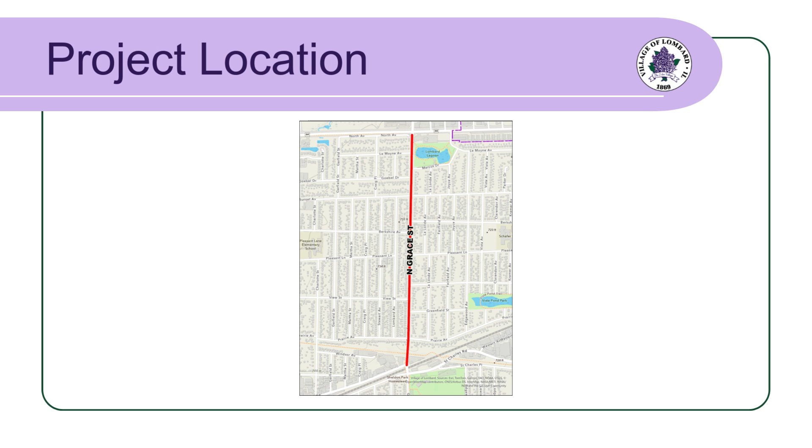The North Grace Street project limits extend from East St. Charles Road, at the railroad tracks, to the North Avenue right-of-way. This segment of the presentation will provide an overview of the project and highlight the key design elements.

Phase 1 and Phase 2 include preliminary and final design engineering. These phases address all technical, safety, and environmental standards, and also include geotechnical engineering and environmental services. All Phase 1 and 2 engineering services were fully funded by the village at a total cost of $302,645. Phase 3 covers the physical construction of the project.

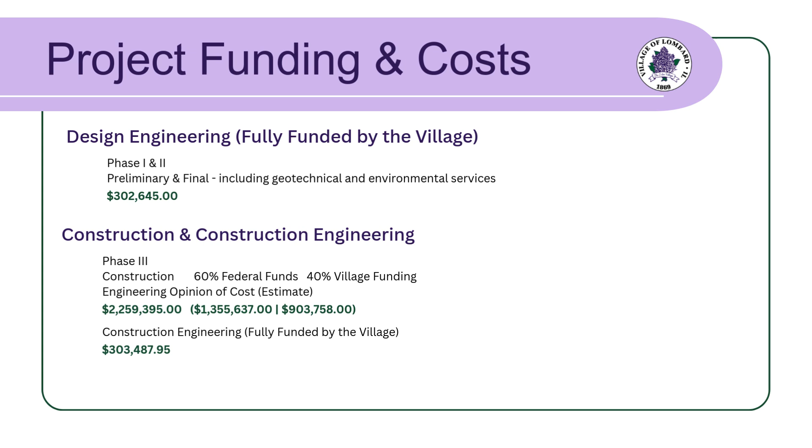Funding for this phase will be shared between the federal government and the village, with a 60% federal and 40% village cost split. The engineer's opinion of probable construction cost is $2,259,395. Construction engineering services, which include inspection and project oversight, are fully funded by the village at a cost of $303,487.95. These services ensure that the construction is completed in accordance with all approved design plans and specifications.

As a precursor to the roadway and multimodal improvements, the underground water and sewer utility system was addressed in 2023. Preliminary design engineering and environmental documentation were completed in early 2025, followed by final design engineering, which was completed in early 2026. This year's work focuses on roadway resurfacing and multimodal enhancements.

Construction is anticipated to begin in early summer 2026 and continue through early fall 2026.

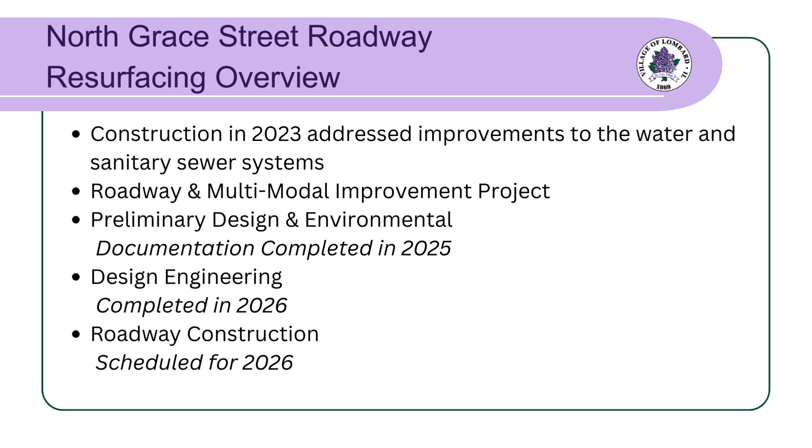Phase 1 included preliminary design, environmental documentation, and public involvement. Design alternatives consistent with Illinois Department of Transportation (IDOT) standards were presented to the Public Works and Public Safety Committees in August 2024.

A public information meeting was held on January 16, 2025, at Lombard Village Hall. The meeting provided an opportunity for residents and stakeholders to review and offer input regarding the recommended design for the North Grace Street project. Final design approval was received from IDOT in October 2025.

Following approval from the Illinois Department of Transportation, IDOT, Baxter & Woodman proceeded with Phase 2 of the project. Phase 2 encompasses the final design process, including the preparation of detailed plans, specifications, and cost estimates.

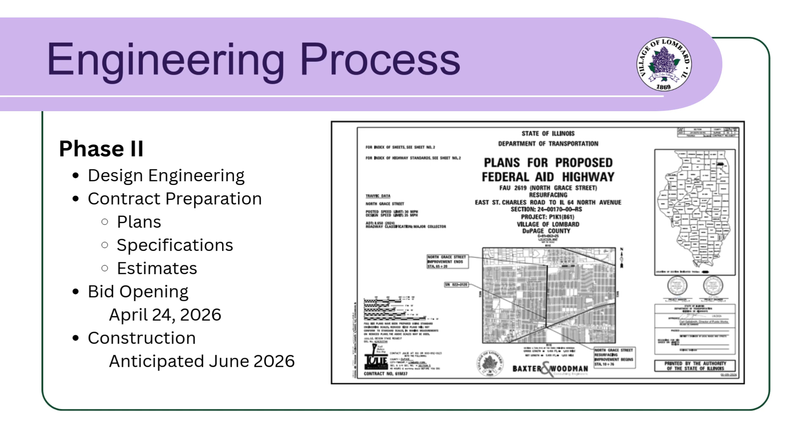The project bid opening is scheduled for April 24, 2026. Construction is anticipated to begin in June 2026. The project includes storm sewer improvements, sidewalk and ADA upgrades, pavement resurfacing and patching, updated pavement markings, and multimodal bicycle accommodations.

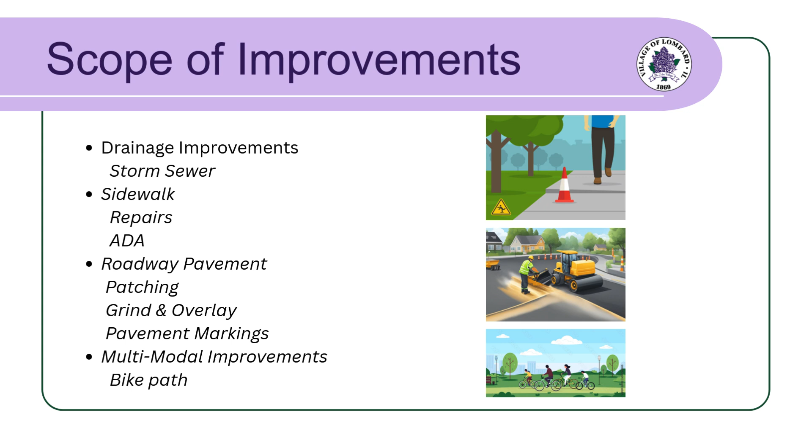Let's review each category in greater detail. Storm sewer repairs will be completed where deficiencies have been identified through closed-circuit televising (CCTV) of the storm sewer system. To enhance drainage, additional inlets will be installed near North Avenue. Necessary curb and gutter repairs will also be performed as part of the project.

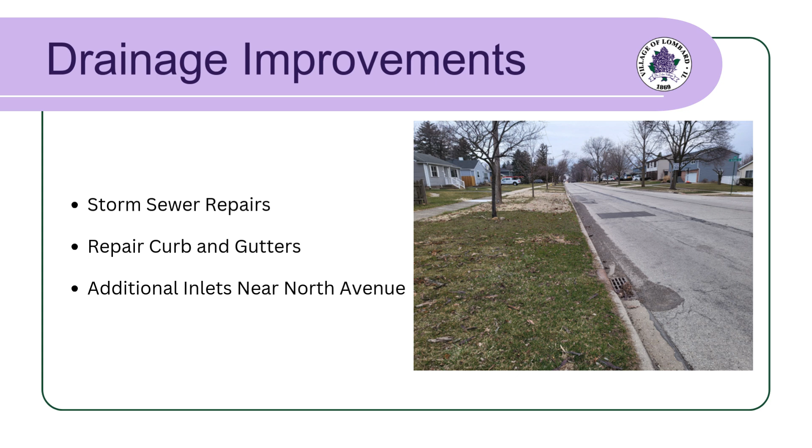Sidewalks have been evaluated for ADA compliance and potential trip hazards. Sidewalk squares with elevation differences of 1¼ inches or greater will be replaced in accordance with village policy. Severely deteriorated sidewalk squares will also be addressed. Sidewalk conditions will be re-evaluated during construction to identify any changes that may have occurred since the initial evaluation was performed.

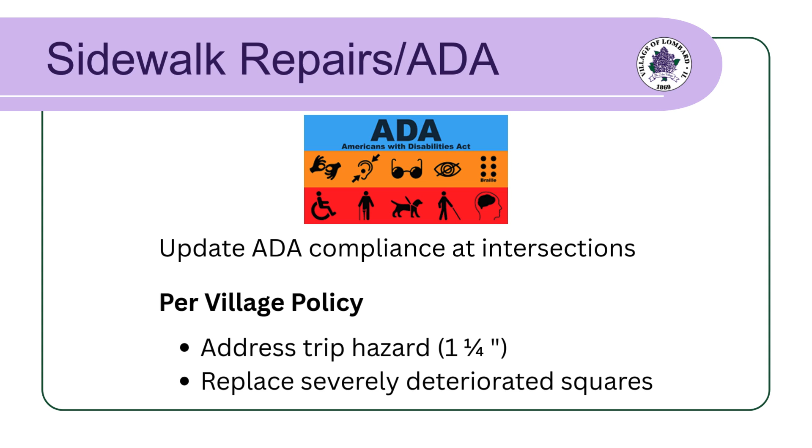Regarding the pavement, identified failing sections of asphalt will be patched as needed. The roadway will then be milled and resurfaced.

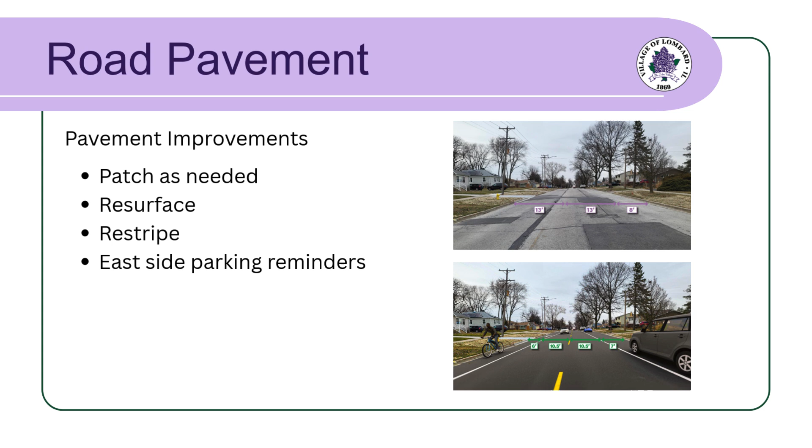Following resurfacing, the street will be restriped to include a southbound bike lane on the east side of North Grace Street from East Prairie Street to Sunset Avenue, along with crosswalks and designated parking areas on the east side of the street. Overall, parking locations will not change.

Multimodal enhancements include ADA ramp upgrades to improve accessibility and ensure compliance with the Americans with Disabilities Act. Existing curb ramps will be evaluated and reconstructed where necessary to provide proper slopes, detectable warning surfaces, and safe connections between sidewalks and crosswalks.

Crosswalk improvements are designed to increase pedestrian visibility and safety. These improvements may include refreshed pavement markings and enhanced crosswalk layouts at key intersections along the corridor.

Bicycle accommodations consistent with the village's bike plan include the addition of a designated bike lane along portions of the roadway. These improvements are intended to provide a safer and more comfortable environment for cyclists while promoting alternative transportation options within the community.

These multimodal elements were reviewed as part of the federal funding process, which required an evaluation of potential design alternatives and consideration of public input. The process included an alternatives analysis to identify the most appropriate design approach for the corridor, as well as opportunities for public comment during the project development phase. Feedback received from residents and stakeholders helped inform the final recommended improvements.

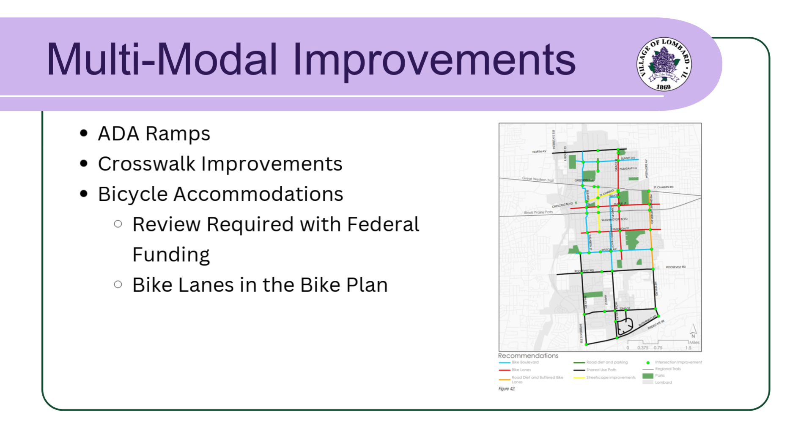The roadway will be restriped to provide dedicated bicycle facilities for safer and more accessible cycling along North Grace Street. A southbound on-street bike lane will be striped from Sunset Avenue to East Prairie Street, providing a continuous and clearly marked path for cyclists traveling in that direction.

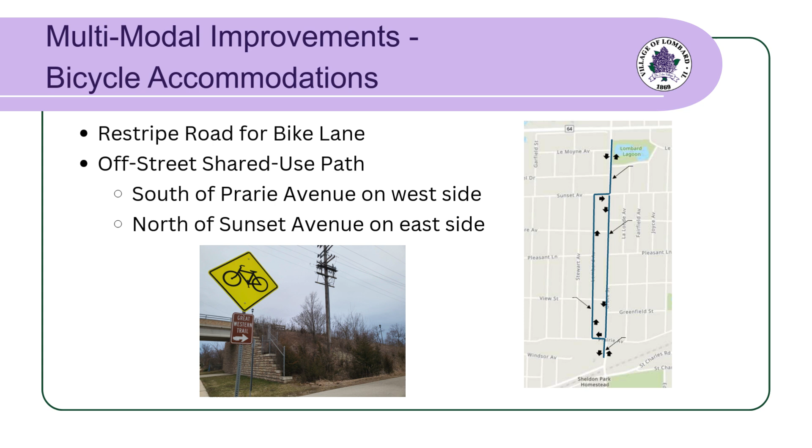Having reviewed the key design elements of the North Grace Street Roadway Improvements Project, the next portion of the presentation will focus on what residents and motorists can expect during construction. This includes the anticipated sequence of work, as well as potential impacts to roadway access, pedestrian routes, and local services. Clear communication of these details is intended to help residents plan ahead regarding any disruptions throughout the construction period.

Ray Schwab is a civil engineer with the Village of Lombard Public Works Department. He will serve as the project manager for the North Grace Street resurfacing project. Matt Champine of the Thomas Engineering Group will be the on-site resident project representative during construction. If you have questions or immediate concerns, he will be your primary contact.

Bids for the project are due on April 24 and will be opened by the Illinois Department of Transportation, IDOT. If IDOT accepts the apparent low bidder, the contract is expected to be presented to the Lombard Village Board of Trustees on May 7. Approximately 3 weeks after the award, the village, IDOT, and the selected contractor will hold a pre-construction meeting. At this meeting, a notice to proceed will be issued, and an approximate project start date will be established.

Assuming all contracts, bonds, and insurance requirements are in place, and any coordination issues with natural gas, electric, and telecommunications services are resolved, construction is expected to begin in June and be completed by October.

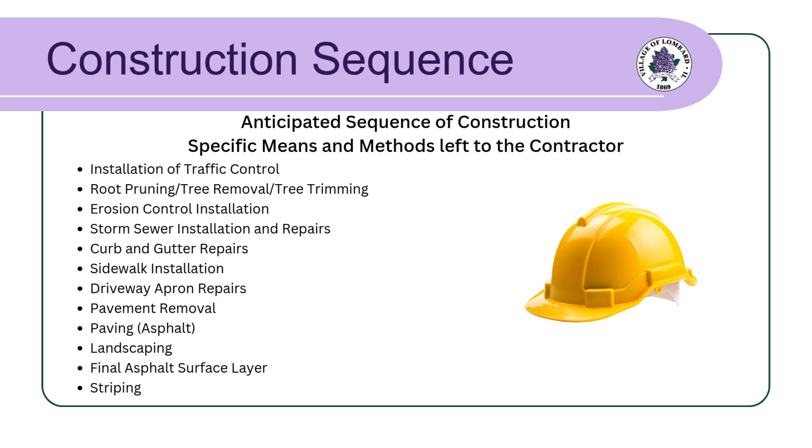The contractor retains discretion over construction methods, subject to the village's requirements for access. Residents will be kept informed about the actual construction schedule through newsletters and Notify Me updates.

Households within the construction area will receive an initial newsletter outlining what to expect during construction and instructions on how to sign up for Notify Me.

During construction, the village will communicate with residents through a series of newsletters and notices. Newsletters will provide updates on project progress and highlight any items residents should be aware of. These newsletters will be mailed every 4 to 5 weeks.

Additional notices will be hand-delivered prior to activities that may disrupt driveway access, water or sewer service, or in the event of unforeseen circumstances that result in changes to services.

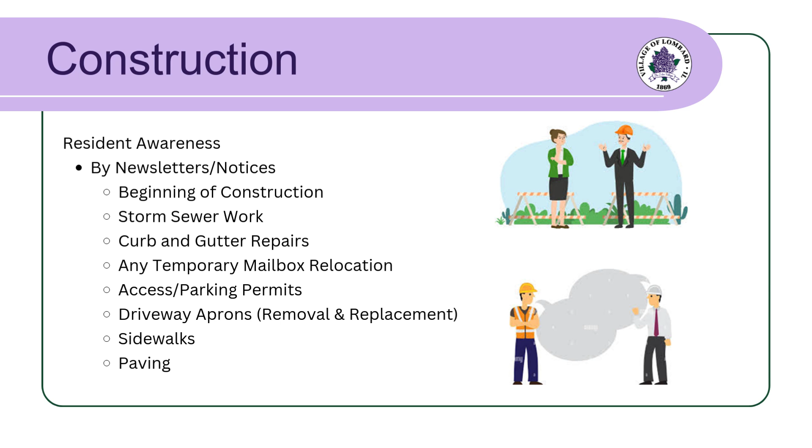The goal is to ensure residents are fully informed in advance so they can plan accordingly and minimize disruptions.

Another form of notice is advance door hangers, which inform residents of pending driveway access restrictions and any water or sewer service disruptions. Water service is typically only disrupted when a service line must be temporarily shut off, which should occur only under unforeseen circumstances.

In such cases, the on-site project representative will contact the affected household to provide an estimated duration of the disruption. As a precaution, residents are advised to keep a gallon of water in their refrigerator.

Driveway access may be limited during working hours. Under normal circumstances, residents will still be able to access their driveways in the evening.

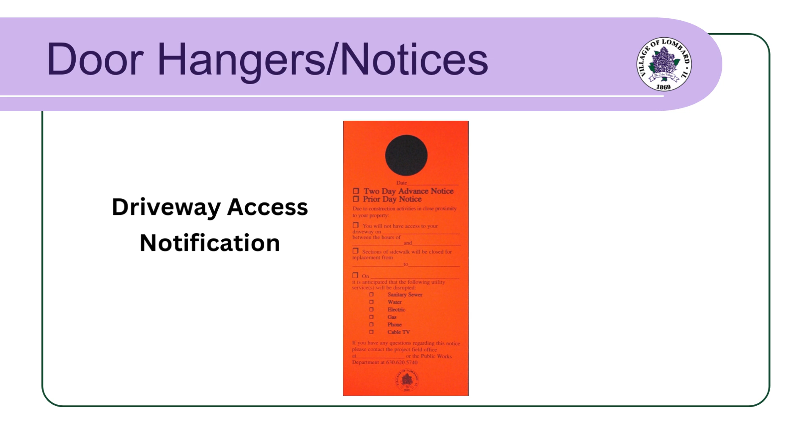Temporary overnight driveway restrictions will apply only to households directly affected by the installation of the concrete portion of the bike path, or whose driveway apron, curb or sidewalk is being replaced.

The village also offers a digital communication tool called Notify Me. Before construction begins, the village will send instructions on how to sign up for Notify Me.

Residents may also visit the village website and register for the service at any time prior to receiving the mailed instructions. Notify Me is an email-based service that delivers timely updates about specific projects or events directly to subscribers. Residents should be familiar with this system, as it was previously used during the underground utility project in 2023.

Work hours are typically 7 a.m. to 4 p.m. Under certain unforeseen events, residents may need parking passes for overnight parking.

This may occur when the contractor is placing curb and gutter, repairing storm sewers, milling or paving the roadway, or during striping operations. Residents whose concrete driveway aprons are being replaced will need parking permits while the concrete cures to a strength capable of supporting vehicle weight without causing long-term damage from premature loading.

The village will mail 2 passes per household. Residents may park overnight outside of the work zone. If additional passes are needed, contact Public Works, and extra permits will be provided.

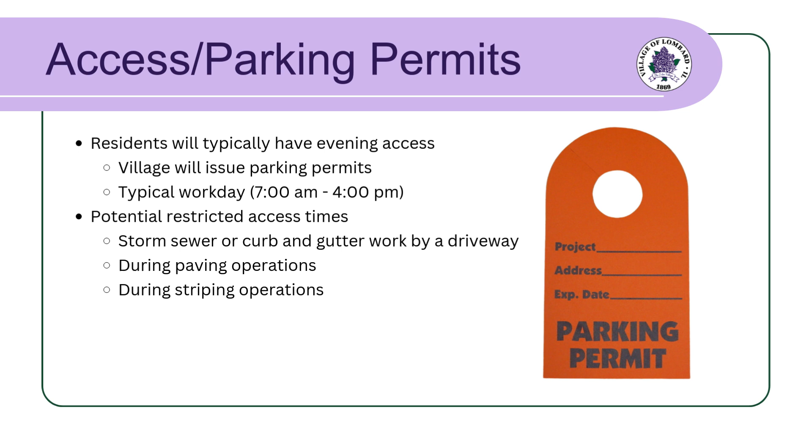Please display the passes, as the police department will be monitoring overnight parking areas. Park only in areas where parking is normally permitted.

Trees scheduled for removal and replacement have been carefully identified by the village forester and will be marked with a white X to ensure clarity for construction crews and residents.

This marking system helps prevent accidental removal of trees that are to be preserved and ensures that the construction process is sensitive to the existing tree canopy.

Replacement trees will be planted near the end of the project. The specific species of replacement trees are detailed in the project plans, and selection has been made to ensure that the new trees are well suited to the local environment.

All planting will occur under the direction of village forestry staff, who will ensure proper spacing, alignment, and soil preparation, and avoid conflicts with overhead power lines, underground utilities, and other infrastructure.

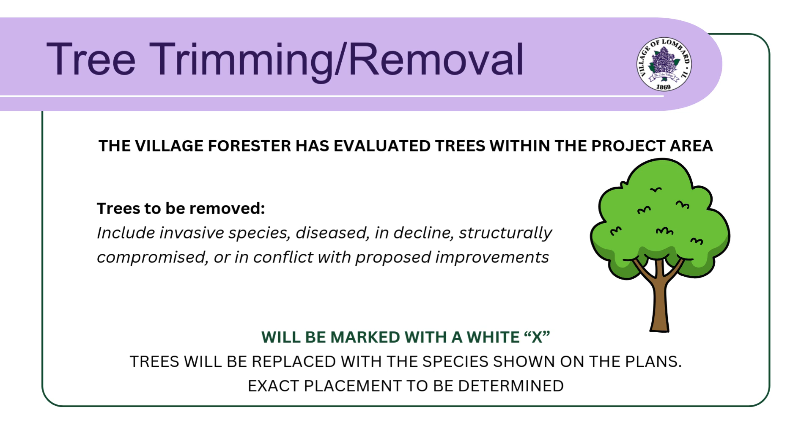Underground utility work will be limited to the replacement of select storm sewer pipes identified as being in substandard condition, targeting areas where pipes are deteriorated or damaged. In addition, storm sewer improvements will be installed near the intersection of North Avenue and North Grace Street. That segment was mandated by the Illinois Department of Transportation (IDOT) as part of the plan review and approval process, ensuring the roadway complies with IDOT drainage requirements.

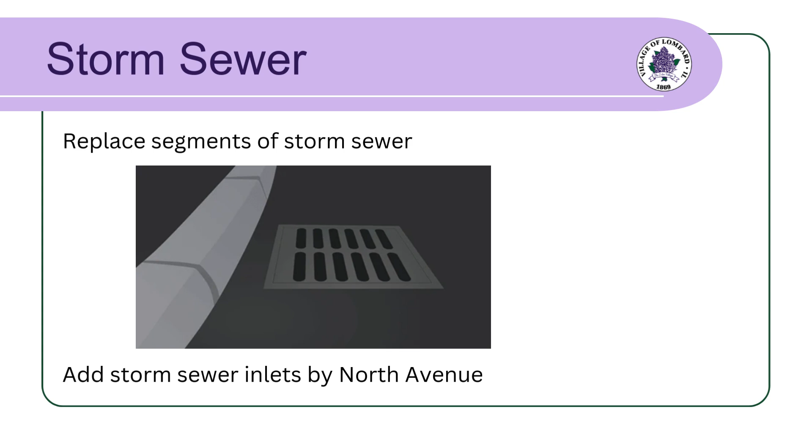Paving operations will be completed in three separate steps to ensure a durable, long-lasting roadway surface. The first operation removes approximately 2.5 inches of existing asphalt, preparing the road surface for new pavement layers and ensuring deteriorated or substandard material is replaced.

Binder course placement: the second operation involves placing a 3/4 inch thick layer of asphalt, known as the binder course. This layer provides structural strength and serves as a stable base for the final surface layer.

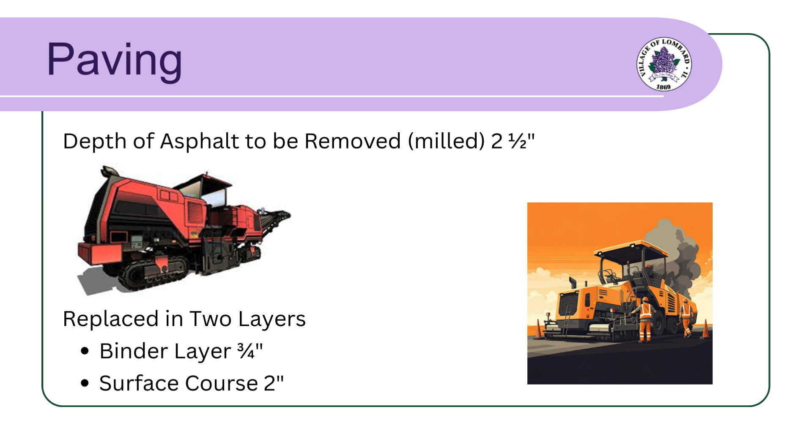Surface course placement: the final paving operation will place a 2-inch thick surface course, creating the smooth final driving surface for motorists and bicyclists. The new pavement will also incorporate an improved cross slope, designed to enhance roadway drainage and reduce water accumulation, contributing to an extended pavement lifespan.

Sidewalk squares designated for replacement include those that do not meet ADA requirements, as well as those identified under village policy as deteriorated or presenting trip hazards. This ensures the pedestrian network remains safe, accessible, and compliant with federal and local standards.

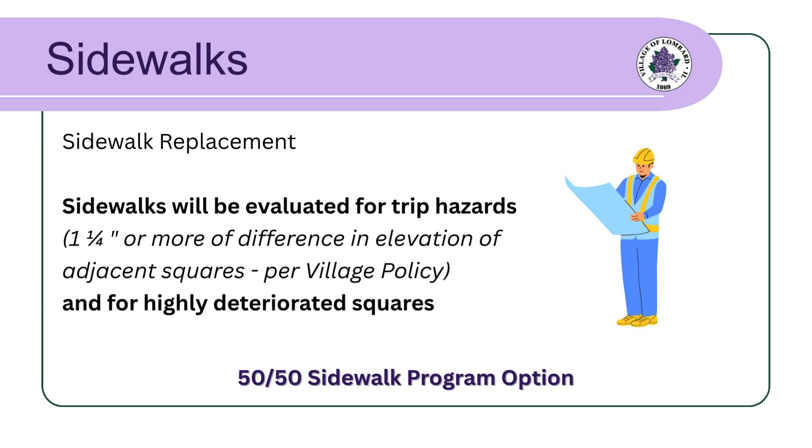For residents wishing to replace sidewalk squares that do not qualify under the standard replacement policy, a 50-50 cost-sharing option will be available. Under this program, the resident pays 50% of the removal and replacement cost, while the village covers the remaining 50%. The on-site project representative can assist residents by providing an estimate for the requested work. Detailed information regarding per square foot costs and participation deadlines will be communicated through village newsletters and the Notify Me digital communication system.

Currently, driveway aprons from Sunset Avenue to Lemoyne Avenue will be replaced to accommodate the widening of the sidewalk for the new bike path. Each apron will be replaced using the same material currently in place to maintain a consistent appearance along the corridor. Additional driveway aprons may also be replaced if impacted by storm sewer, sidewalk, or curb and gutter work. All aprons currently identified for replacement are concrete.

For residents wishing to replace a driveway apron not affected by construction, the on-site project representative can provide a quote equal to the cost incurred by the village, allowing residents the option to proactively upgrade their driveway while the contractor is on site. Please note the contractor is not obligated to perform work on private property. If such work is undertaken, a permit must be secured, and the Village Public Works Department can assist residents with the permitting process.

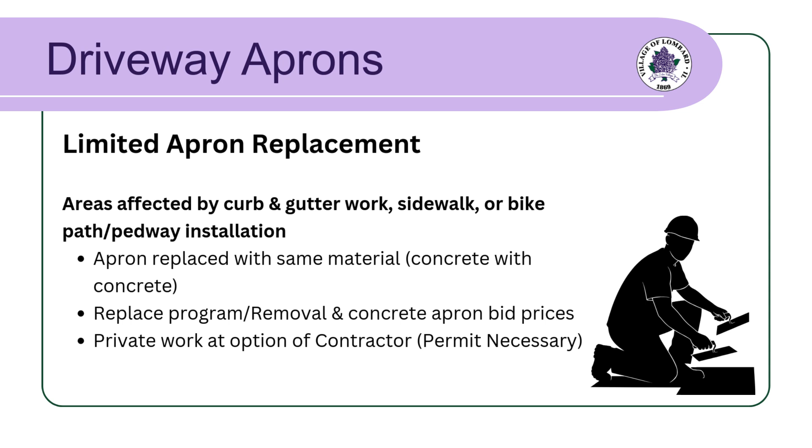As part of the project, parking on the east side of North Grace Street will be clearly marked, including areas near the intersections of cross streets. These markings are designed to improve visibility for vehicle turning movements and pedestrians, enhancing safety at key intersections. These areas are known as sight triangles—a clear corner area at road intersections that must remain free of obstructions so drivers, bicyclists, and pedestrians can see approaching traffic and avoid accidents. Maintaining proper sight triangles is an important safety feature, particularly at intersections with high vehicle and pedestrian activity.

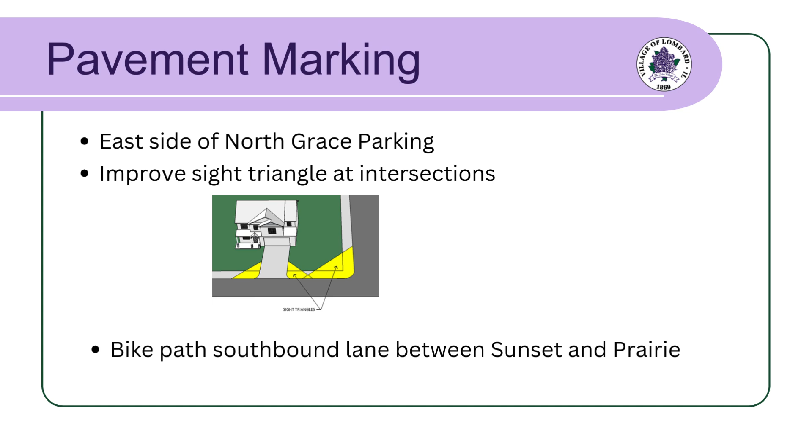On the west side of North Grace Street, the new bike lane will also be marked, running from Sunset Avenue to East Prairie Street. The markings will provide a clear, designated path for cyclists, helping to improve safety, connectivity, and multimodal accessibility along the corridor.